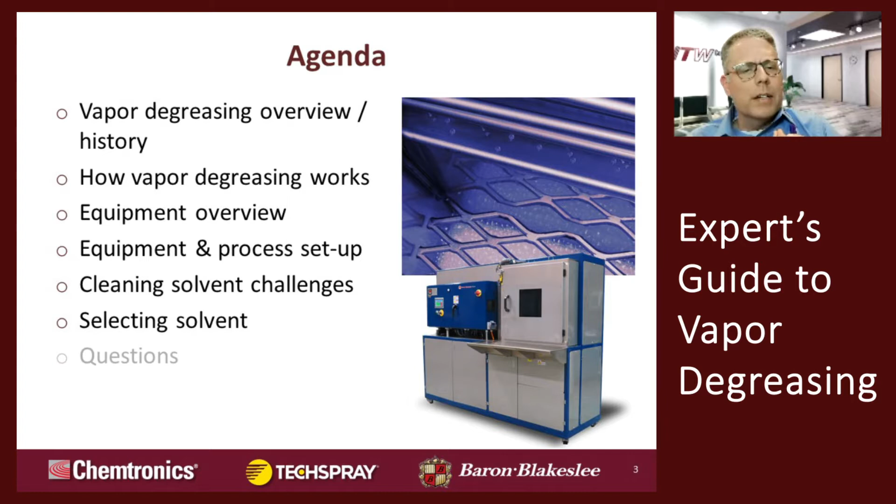So we're going to go through an overview. Pierce is going to take you through an overview of vapor degreasing, a brief history, and explain how vapor degreasing works - a very basic overview for those of you who are not familiar with the technology at all. Then Patrick is going to do a deep dive into the equipment itself - the equipment overview and process setup. Then Pierce is going to circle back into the solvent side of the business, because they go hand in hand. That's why this is such a nice opportunity to get experts on both sides of the business. He's going to take you through the cleaning solvent challenges and how to select a solvent, some of the key things to keep in mind. And then we're going to go through the questions, as I mentioned.

A little history on vapor degreasing. It was developed in the late 19th century. Most of the published accounts list Germany, so that's what we'll go with. The technology migrated over to the US during the 30s, and it just revolutionized critical cleaning. At that point, there really wasn't critical cleaning as we know it today, but it was a fairly large step up from what they were doing. During World War II, it did flourish with all of the added manufacturing going on here in the US.

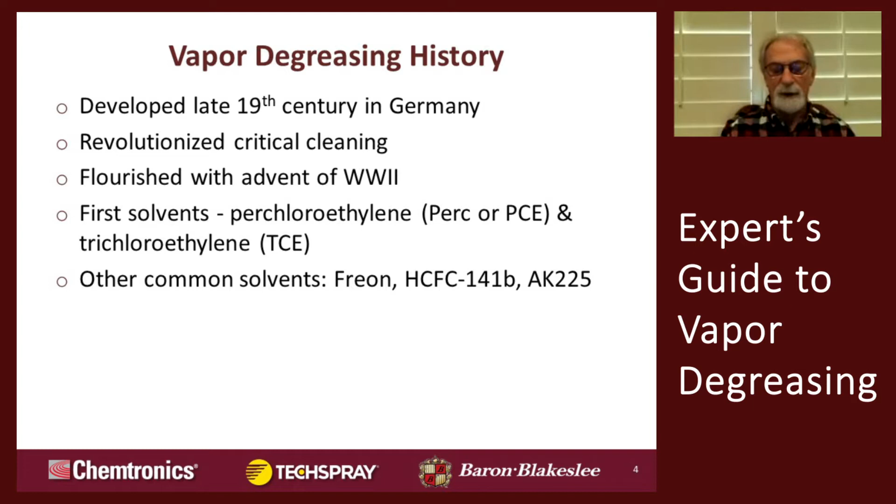The first solvents that were predominantly used were perchloroethylene, known as PERC or PCE, and also TCE, or trichloroethylene. Other common solvents that have come and gone over the years are the various freons, HCFC 141B, AK225. All of those are no longer available. So over the years, there's been a lot of good ones that have come and fell out of favor with the government.

Vapor degreasing today - continuing pressures from the various regulatory agencies has driven equipment manufacturers to refine their technologies, come up with newer ways to capture emissions, and improve the environmental footprint of the equipment. At the same time, the chemistries have changed over the years, again due to regulatory requirements. It seems like every time we find a good solvent, it goes on for a while, and then the government finds some way to take it away from our toolbox. So it's an ever-changing world for both the equipment manufacturers and the chemistry suppliers.

It's in almost every industry you can think of. I've just listed a few here: automotive, aviation, aerospace, electronics, medical, fine machining, firearms - you name it. If it needs to be cleaned, you will find vapor degreasing in that industry.

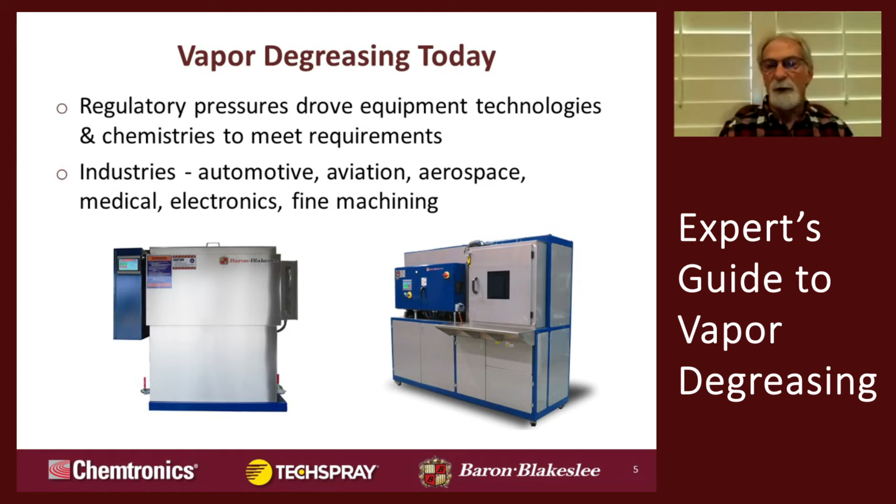So let's go through some basic operation principles. What we're going to do is use the basic 2-sump system: a boil sump and a rinse sump, with just one primary set of coils, without going too deep into the weeds. This is kind of a flow of how this works, and we'll take you through in the next few slides exactly how each section works.

The boil sump: heat is applied to the bottom of the boil sump, which includes the liquid. Everything starts out virgin in these units - the rinse sump solvent and the boil sump solvent are all brand new, never been used. The heat is supplied to the boil sump, and all of the cleaning is done over the boil sump so it can contain all of the concentrated waste. As this liquid boils, it vaporizes and goes up, covering all that empty space between the boil sump and the cold trap or cooling coils up on the top.

So I want to take you through a little bit about how this part is cleaned. This is the main cleaning zone, what they call the vapor zone. As this part is lowered, either individually or in a basket of parts, those parts are cooler than those hot vapors, and this is the essence of how it works. Those vapors come up, hit these cool parts, and condense to a liquid back onto these parts, which dissolves the contaminants, and then continued liquid condensing rinses the contaminants off, and they're captured in the boil sump. Once this part reaches equilibrium in temperature with those vapors, the cleaning stops, the dripping stops, the condensation stops. That cleaning cycle is over.

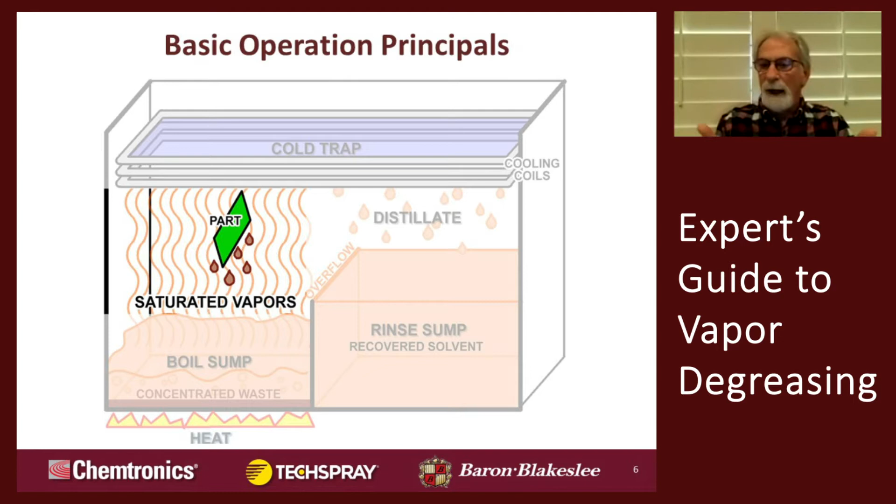Hopefully your part is clean by that point, but if it's not, that's okay, we have a plan B. All you have to do is raise that part or basket of parts back up into that cooler area, let them cool off and create that temperature delta again, and then lower them back into the saturated vapors, and it will start a new cleaning cycle.

The coils run a refrigerant through there of some sort. Some of the very, very old models will run water through it. Most of them are running a refrigerant of some sort now, HFC 134A. Some of the ones with secondary coils are running 404A, which is considered a sub-zero chiller. But what that does, as those vapors come up and hit that cold trap, those coils up there, those vapors will condense just like it did on the part. It condenses on those coils, and then it drips off into a collecting trough.

As it goes into the trough, that actually empties out into the rinse sump, or the distillate receiver as it's called in a lot of cases. That is a recovered solvent. It is clean, and as that fills, it should be kept liquid full at all times. So as it fills, it overflows or weirs back over into the boil sump to replenish that. It's just a cycle over and over and over.

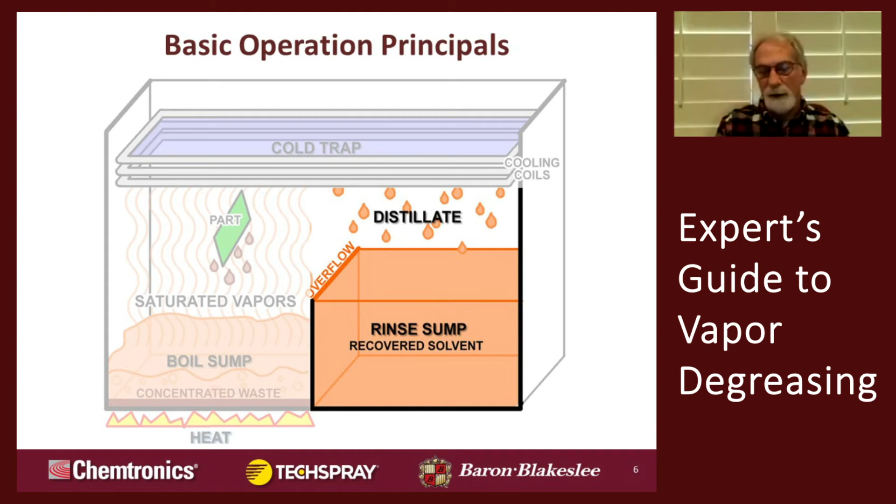As you can see, there's a lot of different cleaning methods available to the operator, and a lot of that depends on, number one, what options your unit has. Does it have a wand? Does it have ultrasonics? Just various different options that are available on the degreaser unit itself.

But primarily it's dependent on the part geometry, the contaminant itself, the chemistry you're using, and the heat mass of that part. The heat mass of that part is actually very critical. You can have a small part or an extremely large part, and that's going to determine the time of your cleaning cycle. The large parts are going to take longer for that temperature delta to decrease, so the part equalizes with the vapor, and you get a longer cleaning cycle at that point.

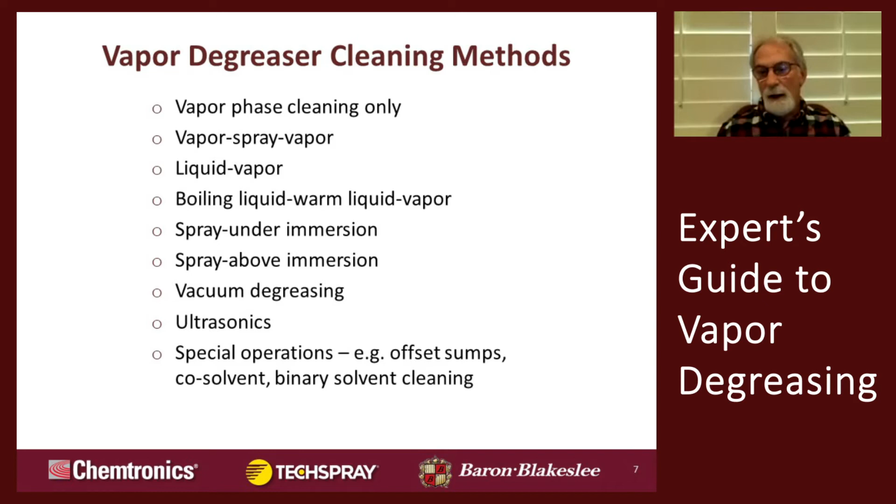A smaller part won't take very long. It could just be a matter of a minute or so, and that part reaches equilibrium, and that cycle is over. We'll turn it over to Patrick to get into all of the nuts and bolts.

Thank you, Pierce. Appreciate it.

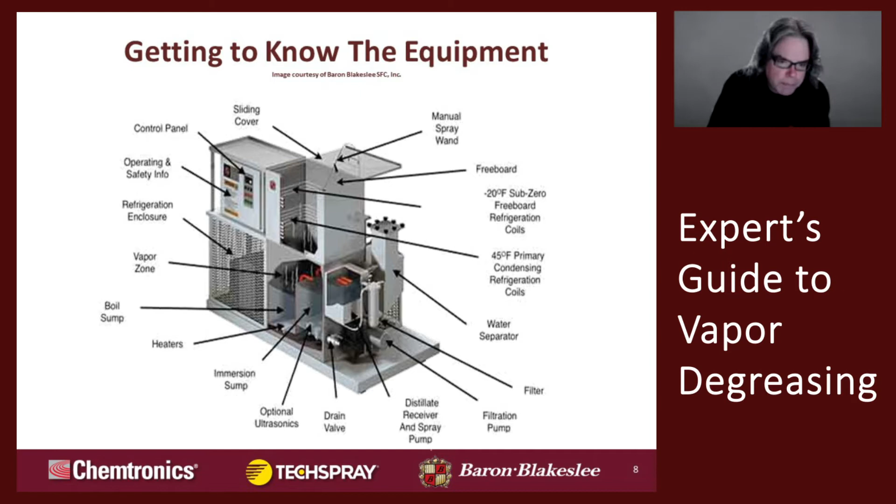What you're looking at here is a cutaway of a conventional open top vapor degreaser. You can see all the parts here that are labeled, and it is somewhat busy, but there are relatively few parts. It's a fairly simple system. Again, as was described previously in the graphic you saw, the boiling sump is the tank on the left, where the heat is applied and the phase of the solvent changes from liquid to vapor.

The vapor is going to float up inside the tank and come in contact with the primary condensing system. This is the lowermost set of coils. As Pierce mentioned, these are the evaporator coils from a refrigeration system. They're cool, normally run around 45 degrees Fahrenheit. This extracts the energy that's applied by the heaters, and then the condensing liquid falls by gravity into a trough below.

There's a gutter, if you will, that runs around the perimeter of the internal area of the tank, collecting the condensing solvent, and then we flow into the water separator. The water separator is an external tank in this case, and it fills with the distillate, and then the water, being less dense than the solvent, can be separated by gravity. It floats on top, you open a valve, drain the water out. From the water separator, it flows into a tank we call the distillate receiver. This is where distilled solvent that has been dried, free of water, accumulates, and it may be sprayed onto part surfaces with a manual spray wand.

This is a common feature in open-top vapor degreasers. Not every machine has it, but many units do have a manual spray wand that the operator can use, controlling with a foot switch to direct low pressure, low flow spray of clean, fresh distilled solvent onto part surfaces to enhance the cleaning of areas of geometric complexity, or if you need to focus on a certain soil that you see on a surface, the wand can help with that.

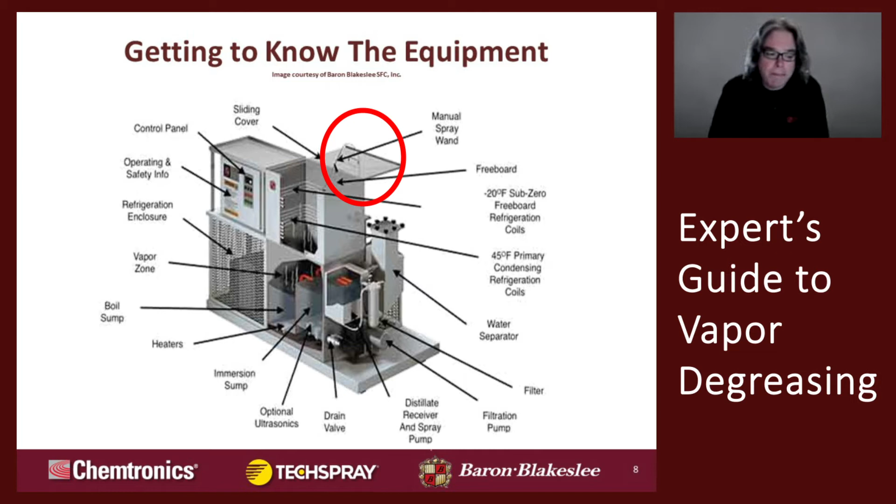All of the soluble contaminants, oils, grease, anything that will dissolve in the solvent, eventually migrate to the boil sump, and they are sequestered there, again, where they cannot redeposit on parts. The sump on the right is the clean sump, the immersion sump, generally filtered to remove insoluble particulate. Often ultrasonics are installed in there to enhance cleaning.

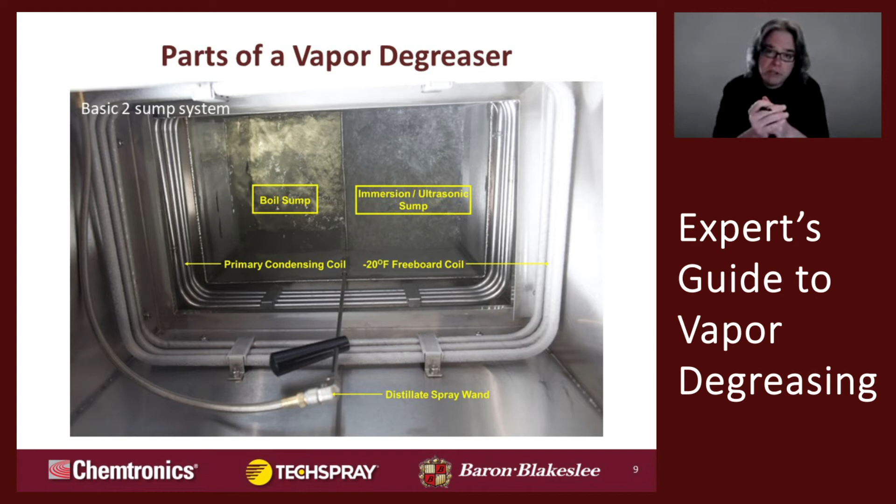We make some very small benchtop-size degreasers where the tank opening is very small, and in those we can get by with a single set of refrigeration coils by virtue of the fact that the tank opening is small. When tank openings get larger, we have to go to a dual refrigeration system, where you've got the uppermost set, the secondary sub-zero freeboard coils. In most applications, these coils are the evaporator side of a refrigeration system. R134A for the primary, R404A for the secondary sub-zero freeboard.

When we get into much larger machines, oftentimes the primary cooling uses water, circulated - some people use tap water, which is very inefficient. Water from a cooling tower, like an evaporative cooling tower, but most commonly it's water circulated through a hydronic chiller, or maybe a glycol water mixture. For the sake of efficiency on large degreasers, that's normally how primary condensing is accomplished with water, and on larger machines we'd be using fin coils instead of smooth wall.

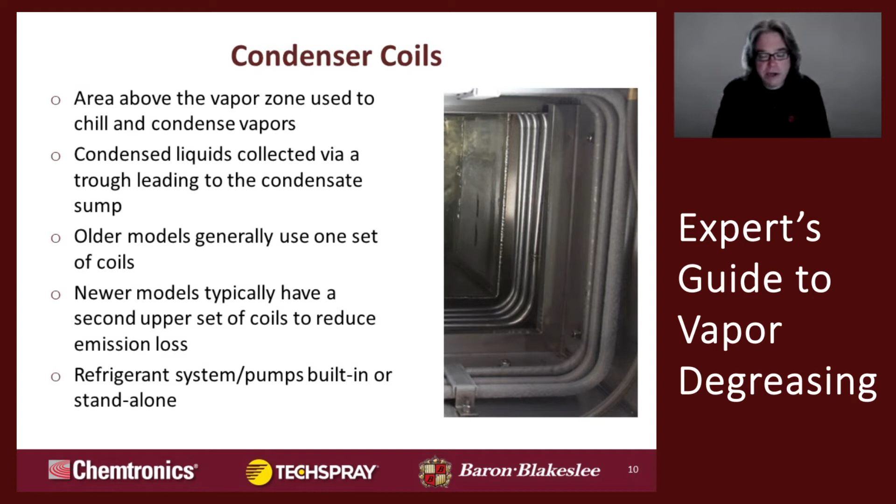So this is a very important feature for solvent conservation, especially in the modern era where fluorinated solvents generally have higher vapor pressures, lower boiling temperatures, and are generally more evaporative than legacy solvents such as trichloroethylene, perchloroethylene. So from the perspective of mitigating impact to operator and environment, and reducing process costs, secondary sub-zero freeboard refrigeration brings tremendous benefits.

There's a mass flow of solvent all around the degreaser from the process of boiling, evaporation, condensation, and accumulation in this sump. So if you're processing parts with soluble contaminants - oil, grease, solder flux, solder paste - it will dissolve in the solvent in this sump, which is constantly being overfilled with fresh, clean distilled solvent.

So the soluble contaminants cascade across the weir, separating this from the boiling sump. There's a constant displacement of soluble contaminants into the boiling sump, and through the process of dilution with fresh, clean distilled solvent, this sump stays clean.

When we design vapor degreasers, we're sizing them to process a specific mass of a metal of given specific heat - steel, aluminum, whatever - per hour. But we're also taking into account attempting to maintain a specific distillation rate, as well as accounting for radiational losses of the metal and so on.

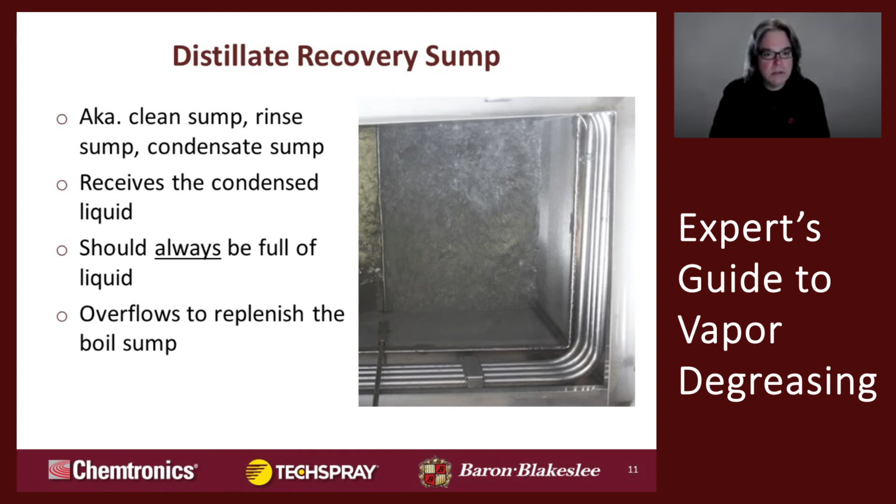This sump is generally filtered to remove insoluble particulate. We'll have a circulation pump that turbulates this sump. It suspends particles in the flow of fluid, which is drawn into the pump suction, and those entrained particulates may be captured on the filter element and therefore removed from the process. Ultrasonics can also be used to enhance cleaning for parts that would benefit from this type of process.

In terms of placing baskets into and out of the degreaser, we want to control that motion. If you put a basket in too fast or pull it out too fast, you could create a draft that could potentially displace vapor. When the basket is in the neighborhood of 50% of the vapor volume, volumetrically and dimensionally speaking, that speed must not exceed 11 feet per minute.

There are some cases where the basket may almost approach the size of the tank opening in terms of its horizontal area. In those cases, we actually slow it down to 3 feet a minute. So 11 feet a minute sounds like a lot, but it's not - it's fairly slow. We regulate all of our programmable material handling systems to operate at less than 11 feet per minute.

To the next point, the freeboard area - this is again the uppermost set of coils. Beyond providing additional efficiency in confining the vapor in the degreaser, that super cold air can be beneficial in recovering minute amounts of solvent or solvent vapor that may be localized around part surfaces, like in the internal diameter of a tube, porosity, blind holes, things like that.

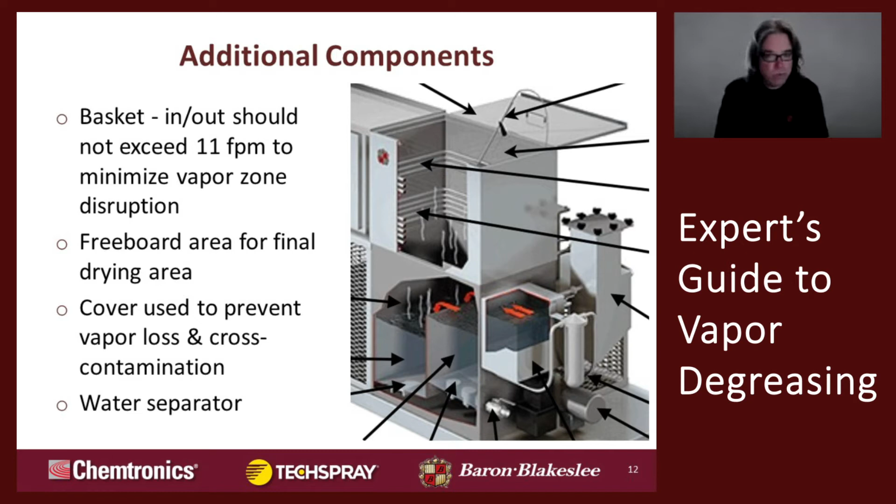But if you can devote literally 10 to 30 seconds a day, you will not have water in your vapor degreaser. It's just that easy to drain.

So we get into auxiliary cleaning options. Again, as I mentioned, ultrasonics. Ultrasonics provide sort of a scrubbing action that enhances the cleaning process. Ultrasonics are available in a variety of frequencies, with the lowest frequencies being the most powerful, the highest frequencies being most gentle, if you will.

Normally we are sizing to a watt density of 40 watts per gallon. So the ultrasonic energy, we try to hit that target of 40 watts per gallon in the immersion. Our standard frequency is 40 kilohertz - that's normally what we use. Although for heavier metal cleaning, more difficult cleaning, we may go down to 25 kilohertz, and then higher frequencies can get up to 132 kilohertz, which is pretty much where it goes. But we've also got some selectable frequency units where you could have like 40-80, 40-80-120, in case you have the need to try different frequencies to see what works best.

The offset boiling sump - you can actually have a degreaser with more than two sumps. Sometimes the boiling sump is offset, meaning if you look down into the tank, you don't see the boiling sump. It's offset and the vapor enters through a slot in the wall. There's a couple reasons you may want to do this. You may want a precision process where you eliminate the ability for the operator to place baskets in dirty solvent. The offset boiling sump accomplishes that objective.

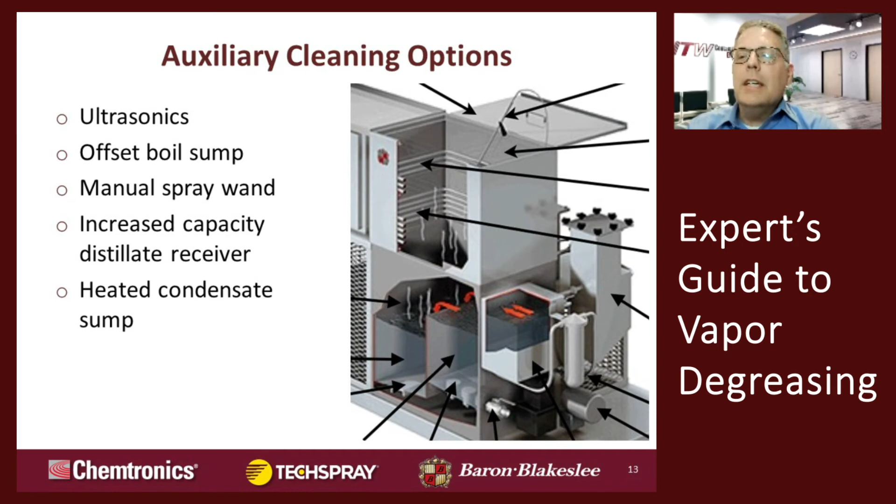Then we go to operational enhancements. Desiccant, typically something called molecular sieve, is used to chemically adsorb water. Sometimes degreasers are operated in very humid environments where it's difficult to control humidity, or certain formulations of solvent may contain an alcohol—for example, in defluxing circuit boards or electronic assemblies, alcohol is often added to help dissolve some inorganic soil components.

The alcohol will dissolve in the water that accumulates in the water separator, so when you drain the water, the alcohol comes out too. The desiccant can slow this process down and prevent extraction of alcohol, but it only provides benefit to the extent it's maintained. Most people split their desiccant into two parts—one half bakes in an oven to dry while the other is in the degreaser, then you switch. It takes a lot of desiccant to adsorb a small amount of water, but it's very commonly used in electronics applications.

Filtration, especially of the immersion sump, is used again to remove insoluble particulate. We've done filtration that runs the gamut—even absolute filtration, down to 0.22 micron or less, for medical or other high precision applications.

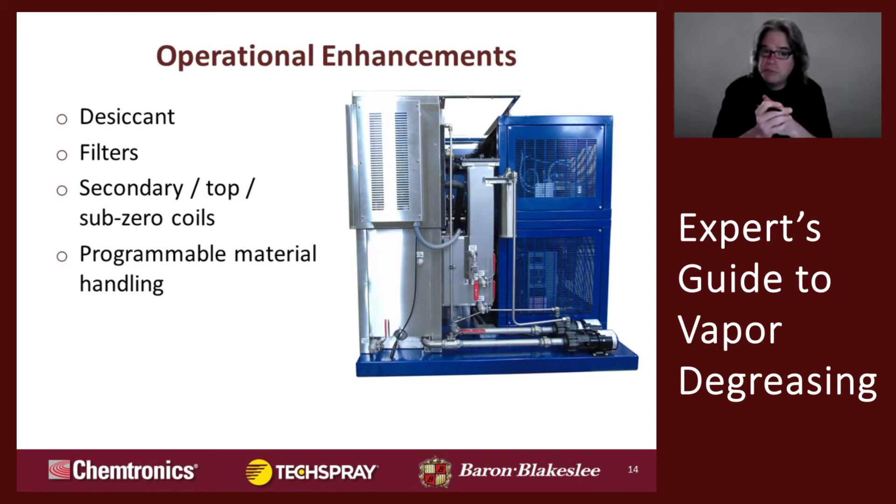The vacuum degreaser essentially performs the same basic process functions as the open top. The main difference is that the entire process occurs in a vacuum chamber. In an open top degreaser you're basically bringing the parts to the solvent, whereas in a vacuum degreaser we bring the solvent to the parts.

The solvent is stored in sealed vessels and the product is placed into a chamber—think of an autoclave, or you may be familiar with a vacuum oven or vacuum brazing oven. We put the parts in a vessel, close a door, pull a vacuum, and pull it down to nearly 1 torr.

When the parts are under vacuum, there's no air between the solvent and the substrate. Air can be a barrier that prevents solvent from contacting the part surface—imagine a blind hole. If you can't displace the air from the interior of that hole, solvent can't come in contact with it. But in an airless degreaser, we pump all the air out.

So when we introduce the solvent, either as liquid or vapor, it rushes in to fill all those spaces. It can get into porosity, blind holes, capillaries, the internal diameters of very long narrow tubes, honeycomb used in aircraft structures—it comes into intimate contact with every space on the part, even the surface underneath a BGA on a circuit board.

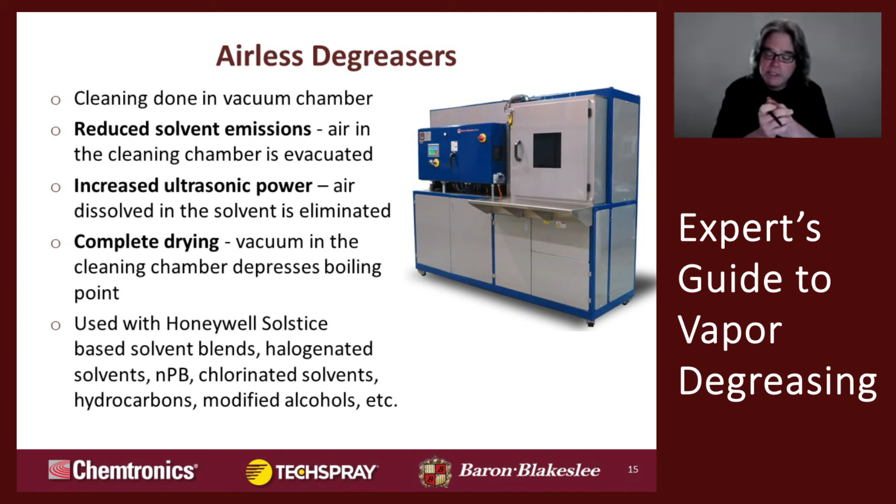Again, the unit location, what we're talking about here, obviously we normally like to have like a 24-inch envelope around the system for ventilation, maintenance access, operator access. We want the system to be level because we're relying in many cases on gravity, certainly for the open top degreasers. So we want everything to be predictable in terms of the level.

The final point is probably the most important. We don't like drafts with open top degreasers. You would not want to install these near open bay doors, fans, HVAC ducts, areas where there's lots of traffic, forklift or whatever passing. Again, if you create a draft over the top of an open top degreaser, you could potentially displace the cold air blanket, maybe displace vapor. So we like to minimize drafts.

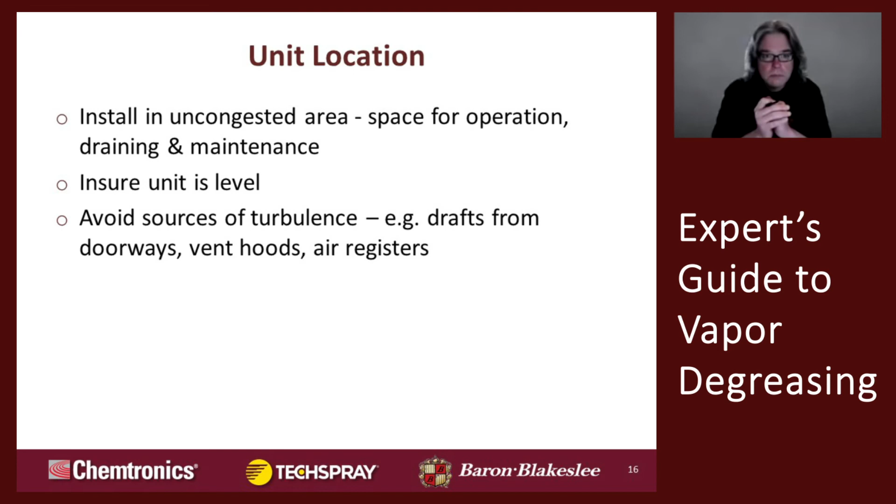This basically describes how you power up a degreaser from start. Obviously, you're making sure all the valves are closed. We turn on the main power, the refrigeration system comes on, and then essentially what's happening is you're cooling the air above the area where the solvent will be placed to minimize evaporation when you're transferring the solvent initially to fill the degreaser. Grounding connections, the system is grounded through its electrical enclosure.

And then we're adding solvent to the recovery sump. It overflows to the boiling sump. And then once you turn the heaters on and the process begins, the interstitial volumes of piping will fill, the distillate receiver, the water separator, and the level in the boil sump may drop a little bit. And then you add a little bit more back to the boil sump to bring it up to operating level, which is normally maybe 2 inches below the weir separating the boil and immersion sumps.

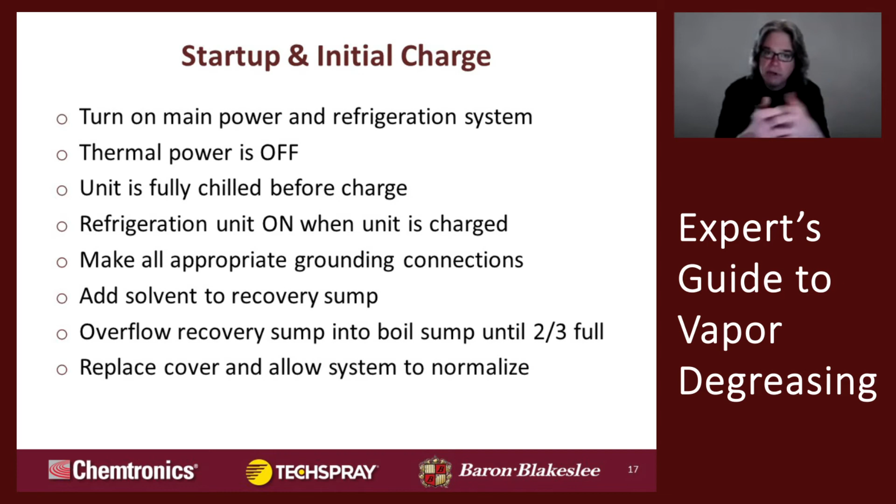Close the cover, let the system come up to temperature. And when we have a control that we call vapor up, which indicates ready to process. When the vapor up condition is met, you can start cleaning parts. And essentially this is basically how you begin heating the degreaser initially to start up the process.

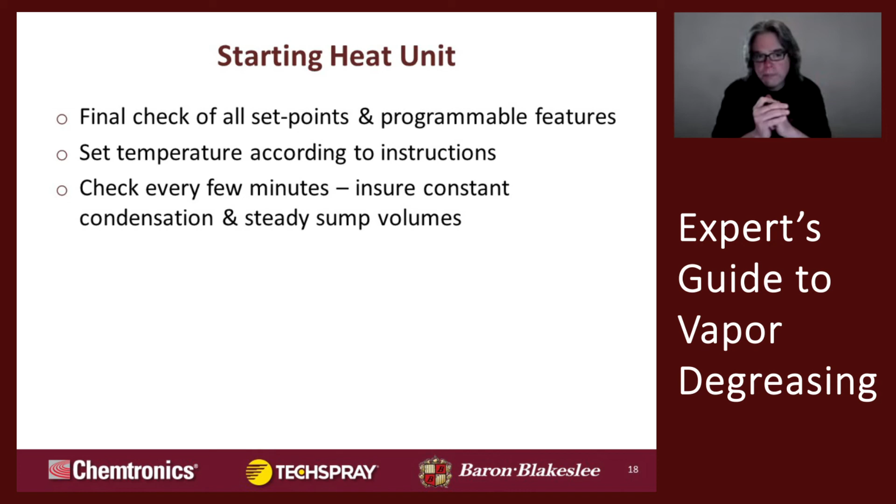We've got temperature, we're measuring temperatures all over the machine. We're comparing those to set points to make sure all proper conditions are met. And the degreaser will create an alarm condition if there's any problem with that, just to make sure that everything's operating safely and predictably. And again, we set temperatures based on the boiling point of the solvent. So that's how we establish control.

The boil sump maintenance. Eventually you're going to saturate the solvent in the boiling sump with soluble contaminants. Normally, when the temperature in the boiling sump elevates approximately 5 degrees Fahrenheit above the boiling point of the pure solvent, it's normally considered to be saturated to about 30% by weight with soluble oils. It's a lot. Now, when you add soluble contamination to any solvent, the boiling temperature elevates. This is how we know that the soil or the solvent in the boiling sump is saturated with soils.

So in this regard, if you create too high of a ratio of soil to solvent, the boiling temperature elevates. It takes more energy input to generate vapor. The efficiency goes down. Not to mention there are some soils, oils, and greases that could become combustible. So we don't want to create a situation like that where the soil could catch on fire. So we've got all these safety controls in place to prevent that.

When you get to the saturation temperature, you turn off the heater and let the sump cool down, and that's when you can drain out the soluble soil residues entrained in the solvent in the boiling sump. Sometimes we enhance this process with a secondary distillation system where you're removing contaminant continuously online and maximizing production, so we have ways to keep the system running and run production simultaneously.

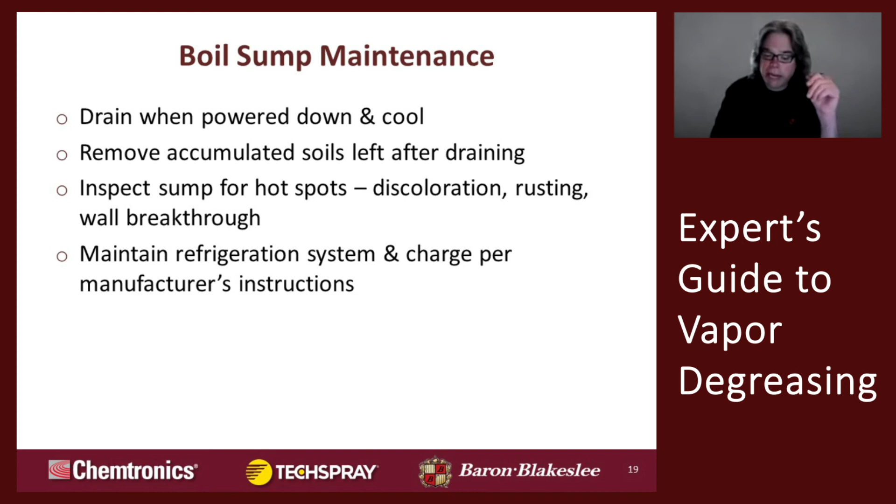Compared to other cleaning processes where it may be difficult to determine the viability of the chemistry, in vapor degreasing it's very easy to monitor simply based on temperature. The system does it basically automatically, it will alarm you and alert you when you've got to pay attention to it. This is basically the sum total of maintenance requirements on a vapor degreaser that you do most frequently.

Again, draining the water separator takes literally seconds. You do it at the end of every day or every shift. That way, the system has been running, distilling, and accumulating all the water in the separator so you can drain it off, and it keeps the system healthy and happy basically.

Some solvents require an acid acceptance test. Generally these are legacy solvents like trichloroethylene, perchloroethylene, N-propyl bromide, also known as NPB. Essentially you're monitoring the stabilizer content that prevents the solvent from becoming acidic. That's a simple titration, it takes about 10 minutes, but you've got to do it.

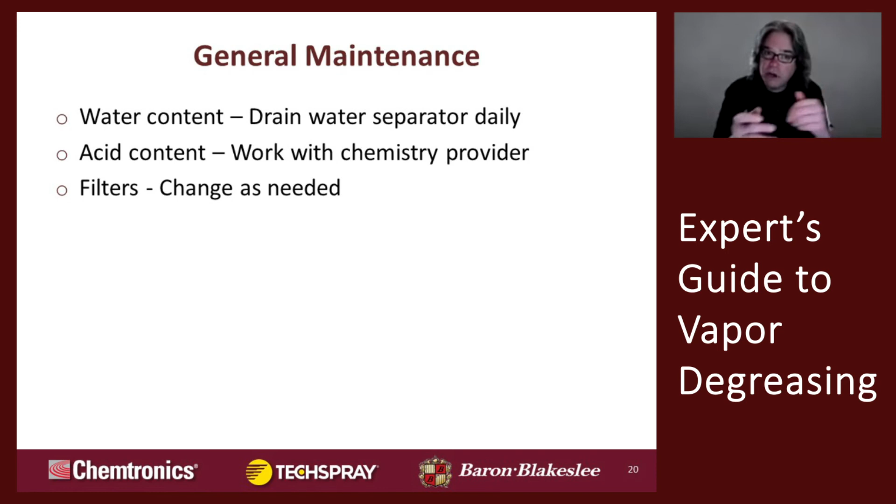Normally we say at least every 2 weeks, but basically as recommended by the solvent manufacturer. The solvent manufacturer can provide the acid acceptance test kit and stabilizer to dose the solvent to return it to control if necessary. Filters, again, we're removing particulate, and when the filter element becomes loaded it must be changed. Often this is done on a preventive maintenance schedule. Some equipment is equipped with differential pressure transducers or gauges that let you know if the filter element's getting clogged. Very simple to maintain.

When your solvent is loaded, essentially what's happening is your solvent is reused over and over, and you're adding makeup as you go along. It's topping off from your operators, just due to normal solvent loss. When it becomes loaded, that just means all the contaminants are increasing your heat load. It's not cleaning like it should.

There may be other aerosolized type contaminants such as water, like Patrick alluded to earlier. And at some point it's not going to meet your cleaning requirements, it's just essentially going to quit cleaning like you want it to.

This needs to be trended based on your chemistry and your equipment manufacturer recommendations. Patrick mentioned 5 degrees Fahrenheit, that varies with the temperature. Some go to 5 degrees C over the normal boiling temperature. It depends on the chemistry, it depends on where the set points are for the high alarms, things of that nature, and also the soils that you're dealing with.

Your normal boil down or change out schedule is just recommended so you stay on top of it and you don't see a noticeable loss in your cleanliness inspections at the end of the operation.

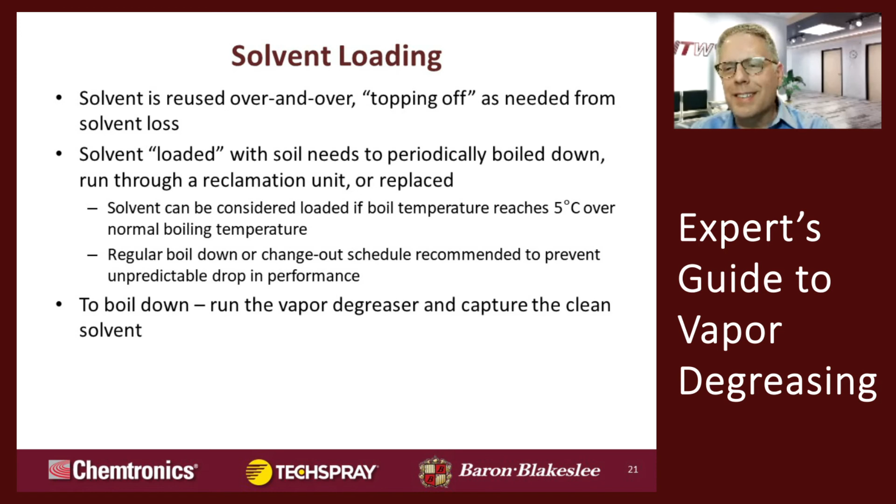I have a question, but I'm going to answer it since it's pretty straightforward. Generally, how many cycles will my solvent saturate before I have to replace it? It's going to be so dependent on so many variables how many cycles you can go through before you have to replace your solvent. So if there's any question, feel free to reach out to Pierce, and he can talk you through the process on how to build that up as a standard operating procedure to keep an eye on that.

Yeah, it basically comes down to your throughput. If your throughput is consistent, you can trend that. If it's very inconsistent, then it's going to be difficult to get any historical data to trend.

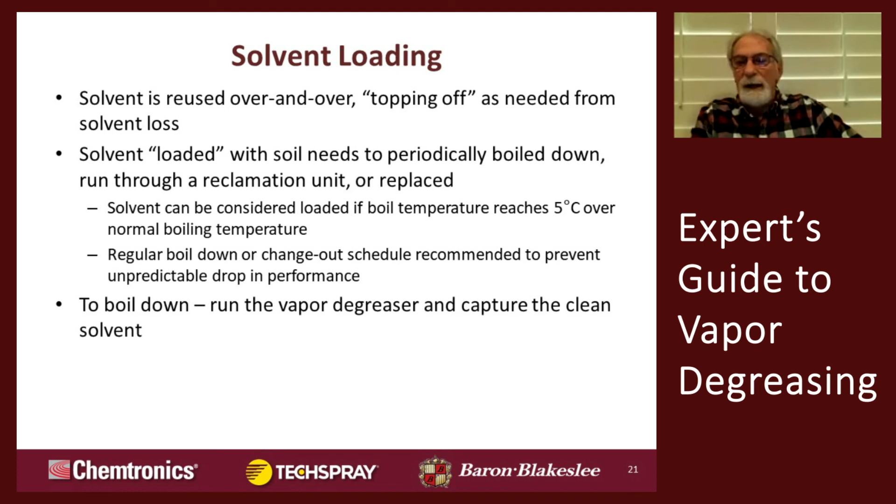As far as solvent selections, essentially you have two types of chemistries: azeotropes and non-azeotropes. It's always recommended to either have a true azeotrope or what has come to be known as a near azeotrope. An azeotrope is a formulation of two or more components, and they do not fractionate.

They will start off with different boiling points, but when mixed in the proper proportions, they actually have one boiling point, and it does not fractionate. As you can see, what an azeotrope does, if you have 50% of A and 50% B, you're going to maintain that same composition from the boil sump to the vapor phase to the condensate phase, from the rinse sump, and then from the rinse replenishing over into the boil sump. It does not change. That is a true azeotrope.

Now, near azeotropes generally can fractionate a little bit, and they will trend. They'll skew a little bit from one end to the other on the compositional mix, but they remain very, very stable once they do that.

Now, a totally non-azeotrope is going to fractionate, so your lowest boiling material is what's coming off first. Depending on what the percentage is in the formula with the rest of them, you may end up with some flammable material in your system, whether it's in the vapor phase or the liquid phase. So it's very important for safety that you know what you're dealing with, and make sure that you quiz your chemistry vendor very thoroughly, because you want to make sure that you're getting the right material and the right equipment to do the cleaning that you need to do.

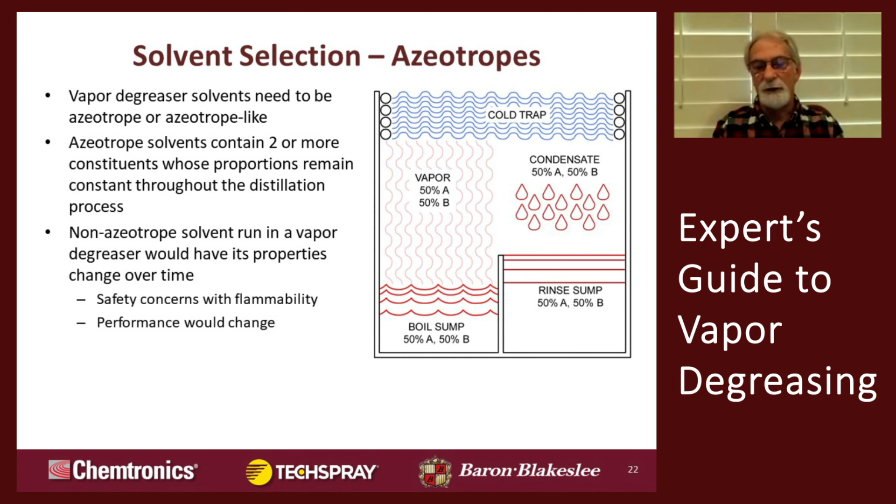Okay, the challenges to chemistry. Well, there's all sorts of agencies that have their fingers in the pie. You've got federal agencies, state agencies, and local municipal agencies. A state cannot get any less restrictive than the feds. They can be more restrictive, but they cannot be less restrictive. That's why you see some of the air quality districts, CARB, some of the agencies in California, for example, are very, very restrictive compared to the federal regulations. And we have to meet all of those depending on whether or not we want to sell in that area.

Over time, the chemistries have changed that we can offer to the customer. The ozone depleters were pretty much completely phased out at the end of 2014. The CFCs were gone years and years ago. The HCFCs like 141B and AK225 are gone.

The HFCs, the hydrofluorocarbons, are now coming under pressure due to the global warming potential. Most people think of HFCs as the propellants in an aerosol. That's true, but there are a lot of HFCs in the formulations in vapor degreasing products. Just two of them off the top of my head are HFC 4310, commonly called Vertrel XF, which is under pressure, and HFC 365mfc, commonly called Solkane, which is a Solvay product, also under pressure. They are both hydrofluorocarbons, so we'll see how that's going to be restricted.

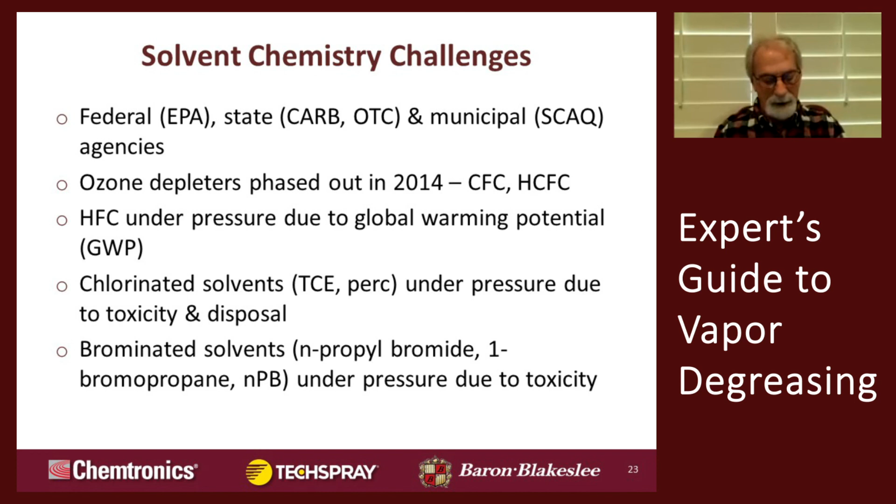The chlorinated solvents, TCE and PERC, have been, over many years, tighter and tighter regulated under various use conditions. That's due to environmental impact from disposal to spills to whatever, also the toxicity in the immediate area for the operators and bystanders. Brominated solvents like NPB have been under pressure for a long time due to toxicity, and now the government is finally looking like it's going to act. I'll get into that in the next slide. These are very common in vapor degreasers. They're inexpensive and they work. That's the bottom line for a lot of operations.

Now, I would like to spend the remainder of the time here on NPB. It's been around for many, many years. In 2014, the ACGIH, the American Conference of Governmental Industrial Hygienists, finally lowered their TLV value from 10 ppm to 0.1 ppm. That's extremely low.

There's a variety of reasons for this. There's various neurological effects, and male and female reproductive effects. Most of these are chronic, but the neurological effects can be acute.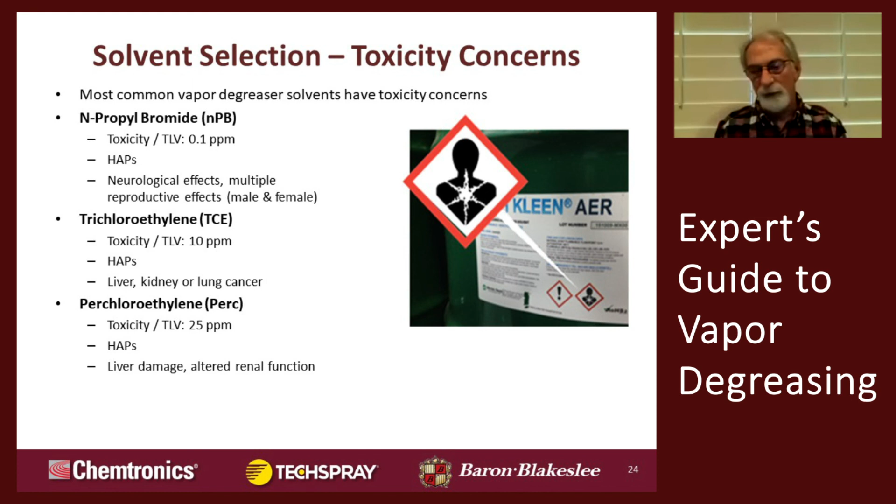If you see over in that diagram to the right, this is one of the new GHS pictograms, commonly called the exploding chest. That can be anything from cancer to other various neurological effects. NPB has that pictogram. Personal protective equipment is needed because if you can smell it, it's escaping from your unit. That's essentially why you need to protect yourself or your workers. As Patrick said, if you have a well-maintained machine, it's going to be extremely minimal. However, most of them are not, or many of them are not. The preventive maintenance is not performed. There's just a lot of reasons.

The gloves, the glasses, the face shield, the respirators if necessary, like the half face masks. Sometimes those are necessary. The biggest thing you can do for your employees is to make sure you keep your EHS team or your safety team in the loop with your vapor degreasing operations and any complaints that your operators or bystanders may have.

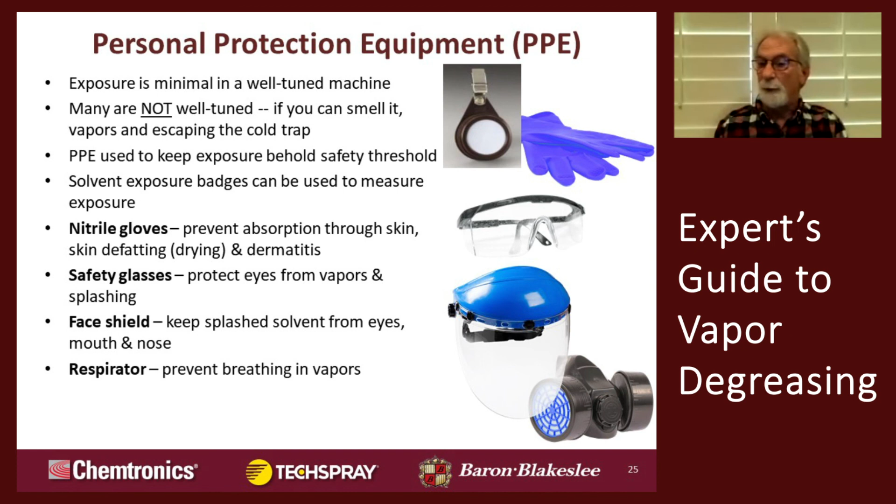Everything in the formulations of solvents, the vapor degreasing solvents, outside of performance is driven by the cleaning requirements of the customer and essentially by regulations. The wish list includes high performance, low VOC (volatile organic compounds content), and low global warming potential. Those options are out there.

Most of the materials that are on the market today have a good record of this.

Chemtronics has the Tri-V line. That is the Electro-Wash Tri-V, the Flux-Off Tri-V. Those are designed as NPB replacements. They are very high performance. The Max-Kleen Tri-V is a near azeotrope. It's highly stable, and it's actually recommended if you're going to have a side distillation system to use that.

Techspray has the PWR-4 line, which are similar to the Tri-V line. They were also designed as NPB replacements. Techspray also has the Precision-V line, and they are very well used for sensitive materials and things of that nature, regulatory compliance, and they are also high performance materials.

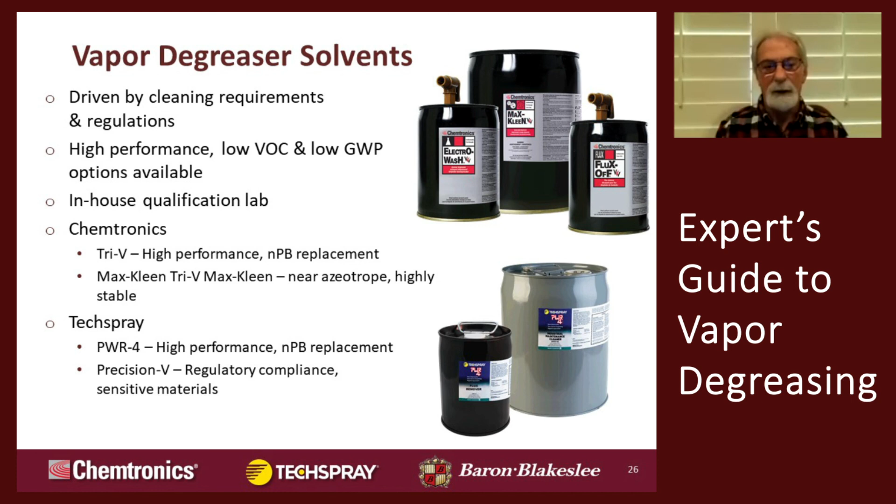And to help you decide where you need to do that, Techspray and Chemtronics has an in-lab qualification team. We can run your materials, simulate your materials with the same soils, and do cleaning trials for you. We'll help you in any way necessary.

Now, some final words. Relationships matter, they absolutely do. And the best relationship that you can have is between your operations people and the equipment manufacturer and your chemistry supplier, both for training and maintenance of the equipment and any challenges, any changes in your operations that may need changes in the parameters of the process operation, and any new solvent qualifications that you may need to go on as your needs change. So now let's go through some questions.

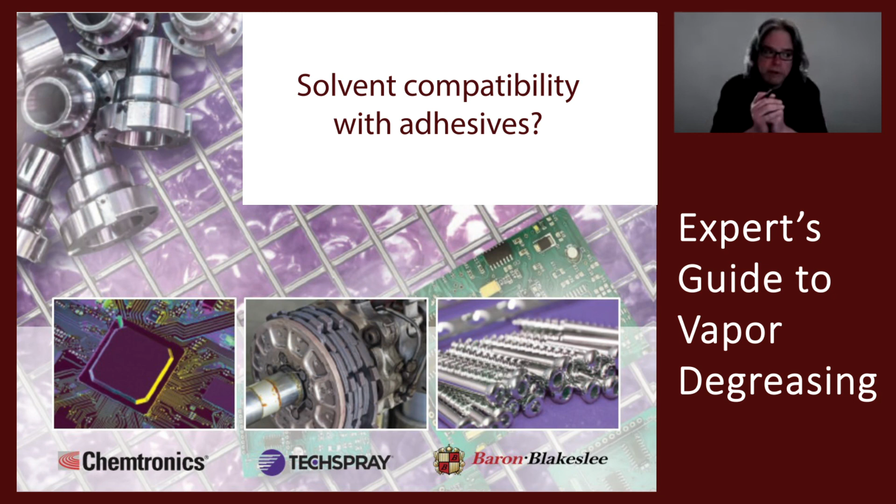Is there circumstances where it can react to glue, adhesives? Is that an issue? Depends on the glue. We've got some cases where people are using the vapor degreasing process to strip off glue. Sometimes glue is removed unintentionally because it's incompatible with the solvent, and there must be a million glue formulations out there, so it needs to be looked at from a case-by-case perspective. But there's lots of materials we're cleaning that are laminates or assemblies or electronic in nature that have glue, and with the right solvent, right glue combination, it's not a problem. If there's a chemical incompatibility, it can damage or remove the glue.

The solvent supplier contact would be a good contact for that. If you think about it, the solvent doesn't necessarily know the difference between the soil and the substrate. So you've got to dial that solvent in to where it is a good match for your substrate, to where it attacks the soil, not the substrate -- so your glues that you want to stay put, stay put.

So what do you suggest if the freeboard coil does not have a negative 20F, and perhaps has a 70F? Should we stop using the equipment right away? So apparently there's older equipment that is not keeping the solvent in place, and there's actually coworkers noticing the odor on the floor. So Patrick, what would be your recommendation for a situation like that?

That could be a real issue. It depends on what solvent you're using. You may be exposing your operators to a level beyond that which is permissible or recommended. You may have an air permit that's being impacted, and then you're going to be replacing the solvent that's evaporating, which is going to cost you money. Typically, a local certified, licensed refrigeration technician can repair that freeboard refrigeration system for you. It may simply be an issue with the refrigeration system, or it could be a control issue.

Oftentimes, this is not a guy who works on air conditioners -- more like an industrial process refrigeration technician. Typically somebody with low temperature experience can fix that. I don't know where you are, but there's somebody in your town that can fix it. Or if it's a Baron Blakeslee unit, call us, and we'll do what we can to guide you through it and help you any way we can.